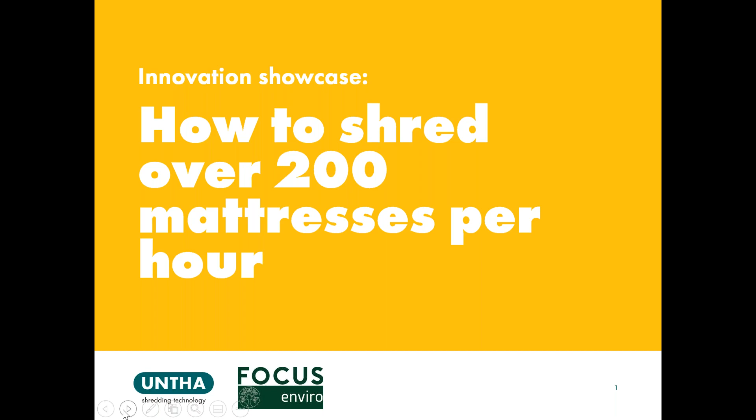Katie, as usual, thank you very much for that excellent introduction, very much appreciated. So, as we're presenting on a truly global stage, let me open by saying good morning, good afternoon, and good evening. My name is Gary Moore. And as you can see from the slide, I have gained some considerable experience in delivering the correct shredding technology and solutions to suit customers' many applications.

The majority of these for alternative fuels and waste recovery markets. With extensive knowledge of UNTHA's world-leading shredding technology, I am responsible for new business development and key account management, in which I proactively seek out fresh project opportunities, especially within the alternative fuels, waste, metals, and plastic market sectors. I work alongside senior waste and recycling decision makers to devise shredding solutions that will achieve their business objectives. I have over 25 years global shredding experience and joined UNTHA in 2015 and have director level role across Europe, Australasia, and the USA, with my own base being the UK as sales director. I have responsibility for strategic growth and development of the Australian market for the waste and recycling product range and the USA for the waste range.

Working alongside our Australian sole distributor, FOCUS Enviro, we continue to penetrate the alternative fuels market for UNTHA's revolutionary XR static and mobile shredder, designing and supplying best fit, client-centric shredding solutions for a wide range of UNTHA potential and existing clients.

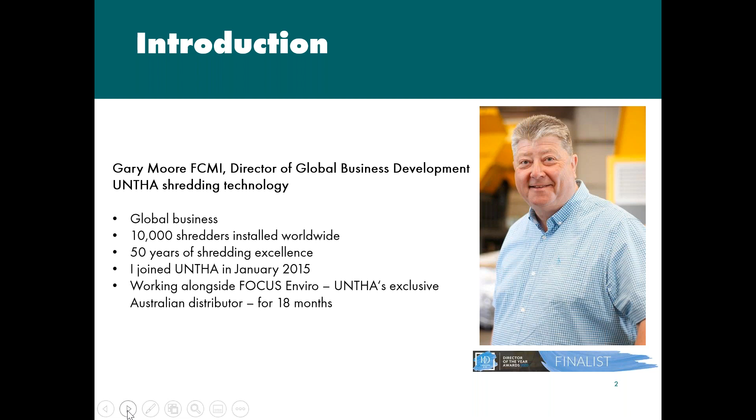So we've caused quite a stir in the UK when it comes to processing mattresses. And we think with the help from FOCUS, we can transform opportunities for operators in mattresses here in Australia too.

To give you a flavour of why, and to highlight exactly what we're here to talk to you about today, we'd like you to watch this 40-second video. It won't play sound as Katie advised, but you'll be able to watch it again with the music when you get your own copy of the slides later, so enjoy.

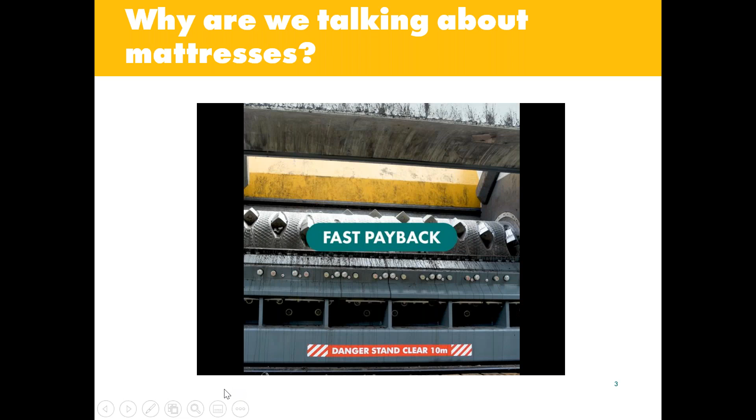So if we drill down into the topic of mattresses in a little more detail, we learn that of the 67 million tonnes of waste produced in Australia every year, you are currently disposing of 1.8 million mattresses, and that's how many reach a landfill site. That doesn't take into account any that are fly tipped or unscrupulously disposed of.

In the UK, the problem is even larger, with 7.5 million mattresses being landfilled per annum, which costs the UK over 20 million, or an estimated 37 million Australian dollars. In the USA, the number of mattresses being discarded every year is close to a staggering 20 million units.

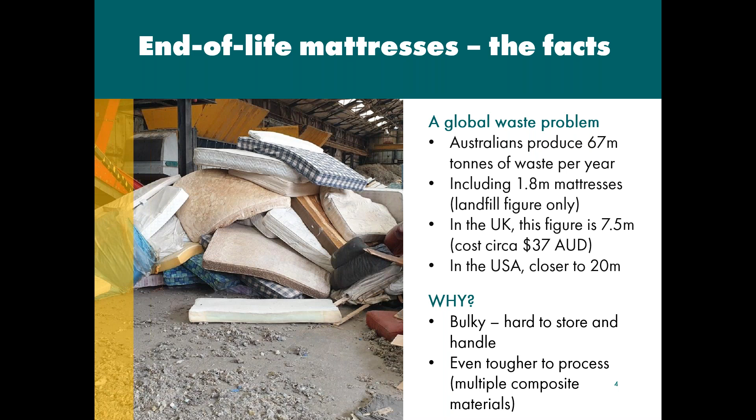So why are mattresses such a notorious and mounting waste challenge? There are many reasons, but primarily because they are really quite tricky to store, handle, and recycle. They contain many different composite materials that, without sophisticated processing, are locked inside this problematic waste stream.

For decades, companies have considered that there's no quick fix when it comes to processing mattresses. However, turning a blind eye to this issue cannot continue. Disposal costs are mounting, landfill space is running out, illegal dumping is sadly on the rise in many countries, and environmental pressures are growing. However, because of the headaches associated with their size and makeup and the cost traditionally associated with shredding mattresses, many operators consider them economically unshreddable.

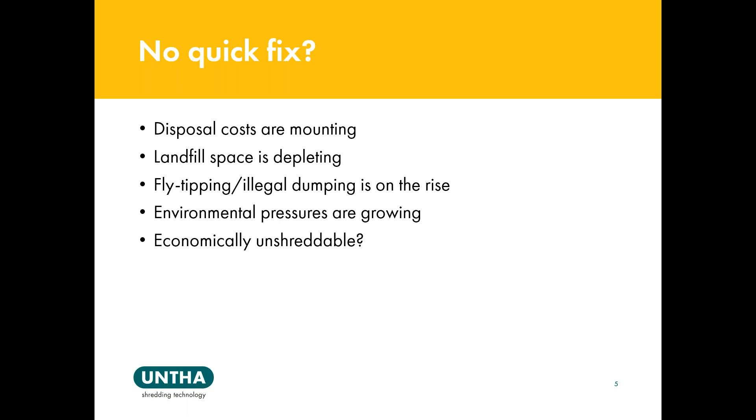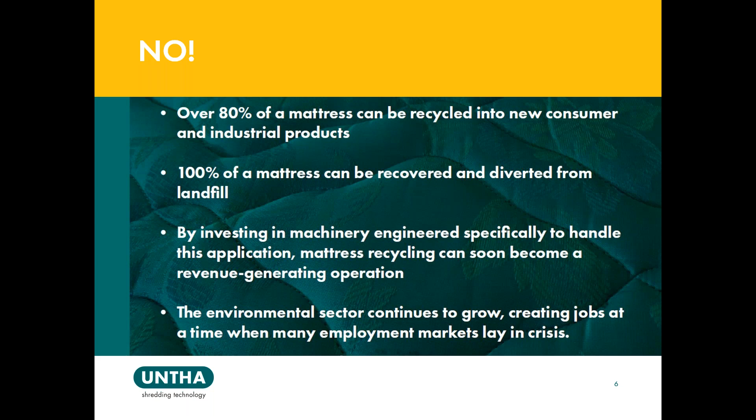But this couldn't be further from the truth. As we can see on the slide, over 80% of mattresses can be recycled into new consumer and industrial products. 100% of the mattress can be recovered and diverted from landfill. And by investing in machinery engineered specifically to handle this application, mattress recycling can soon become a revenue generating operation. The environmental sector continues to grow, creating jobs at a time when many employment markets lay in crisis.

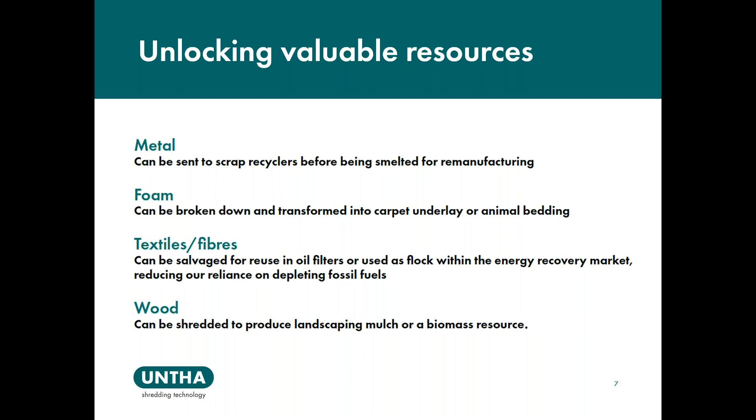So to be clear, there are lots of valuable resources within a mattress, and it's possible to get your hands on all of these. Unlocking those valuable resources, such as metals, this can be sent to scrap recyclers before being smelted for remanufacturing. The foam can be broken down and transformed into carpet underlay or animal bedding. Textiles and fibres can be salvaged for reuse in oil filters, used as a flock within the energy recovery markets, which are reducing our reliance on depleting fossil fuels. And of course, wood can be shredded to produce landscaping mulch or a valuable biomass resource.

So exactly how can we address this recycling challenge? To bring this topic to life, I'd like to shine the spotlight on a project I've been involved with over in the UK.

TexTech Limited is a company owned by JPE Holdings Limited that have more than 30 years experience of recycling technology and knowledge and are revolutionising mattress and bulky waste recycling. TexTech are based in Whitchurch, Shropshire in the UK. They're a recycling company whose aim is to divert as many mattresses from landfill as possible.

TexTech are working hard to convince as many companies as possible to recycle their unwanted waste rather than send to landfill. They already work with local authorities across the Midlands and many retail outlets to improve the recycling rates of mattresses, sofas, and other bulky waste across the UK.

TexTech have invested 18 months into the research and development of the first bespoke mattress and bulky waste shredding line that will divert a staggering 1 million mattresses a year from landfill. The UNTHA XR3000 HT shredding system design enables the successful separation of the flock from the steel, ensuring 100% of mattresses, sofas, or other types of bulky waste products can be recycled.

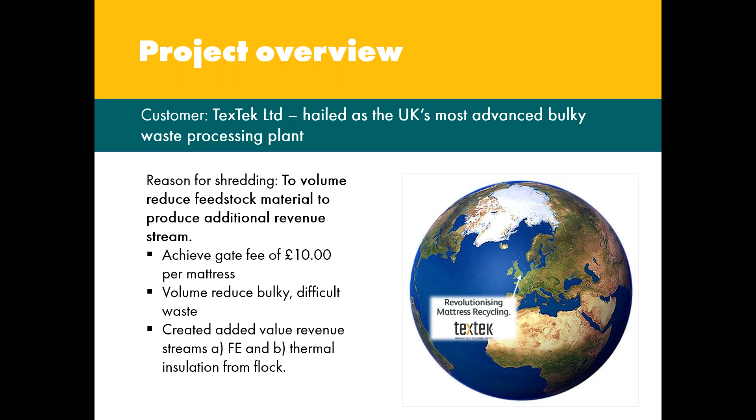And if we delve behind the scenes of their UK operation, we find that we have a challenge. Retailers and local authorities face two big challenges when recycling and recovering mattresses and bulky waste. The first is the separation aspect. The second is finding feasible end markets for the many complex materials to be recycled.

Traditionally, manual separation has been the only effective way to strip a mattress, but this comes with many risks. It's time consuming and expensive. Bulky mattress waste is notoriously difficult to recycle. Separating the multiple elements is time consuming, requiring highly physical and potentially dangerous working practices. Pocket spring-based mattresses and sprung mattresses in particular offer specific challenges as they contain between 1,000 and 10,000 single springs, each wrapped inside a textile-based polypropylene.

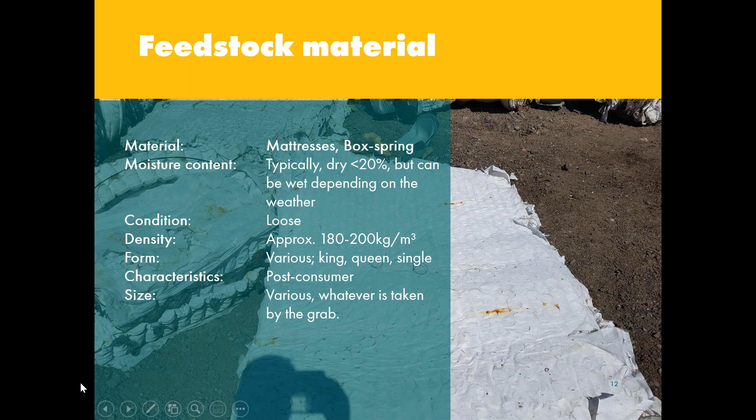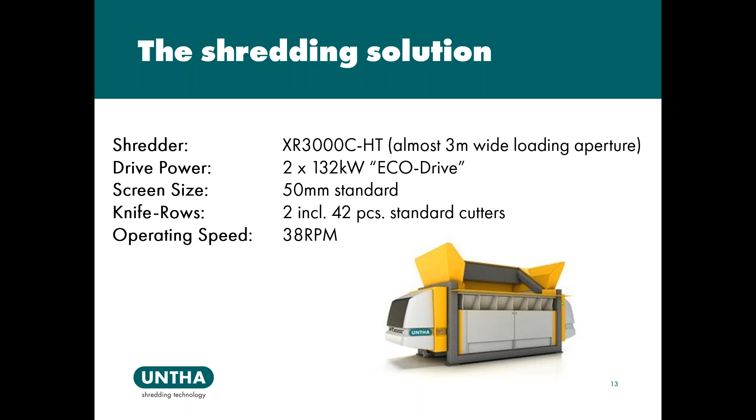For the shredding solution, we use the XR3000 CHT single shaft shredding system specifically for this application. The system is equipped with 2 x 132 kilowatt eco-synchronous drives, a 50mm standard screen for maximum liberation and separation of the ferrous and the flock, with very low operating speeds. Low speed benefit provides low noise, low dust, low heat generation, and low operation and maintenance costs.

Continuing with the shredding solution, we have an application-specific oversized feed hopper with a very large aperture for bulky product processing, aggressive cutters that grab, shear and fragment material while processing, individually replaceable, and Hardox rotor hard facing for wear resistant and long life rotor operation.

Quick change screen systems that can typically enable product sizing changes in 30 to 40 minutes. RAM assist to ensure the machine operates at peak performance by providing positive force on the rotor at the appropriate time. Rubber tracks for high performance on screedy floor surfaces, and vibration absorption.

Auto lube - fill it up and forget it. Computer control to ensure indication when low, and stops machine operating if below specific charge levels.

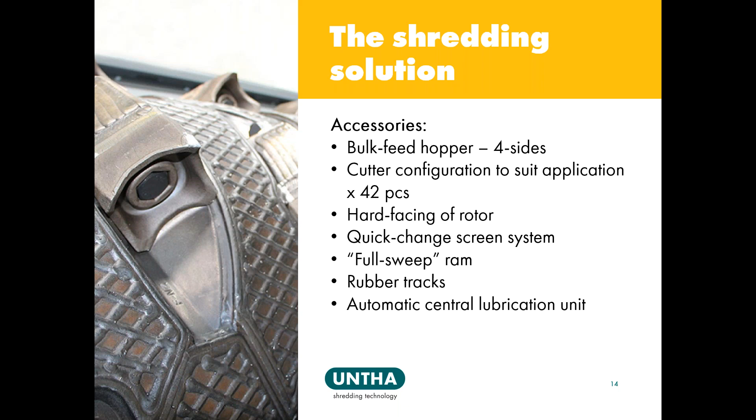And the ease of operation - the system can be fed by several proprietary options: grab, front end loader, conveyor. We have high performance, durable transom style conveyor belt discharge, which allows for 1 or 2 machine operation.

We have inline magnetic separation. Multiple magnets improve the purity of the commodity. We have air boxes for the removal of the light fraction, which enhances that commodity purity.

As indicated, over 200 mattresses and up to 288 for 2 machines in a single line. We have the ability for flexible operating hours, but typically these systems are operating 6 days a week, 10 hours a day.

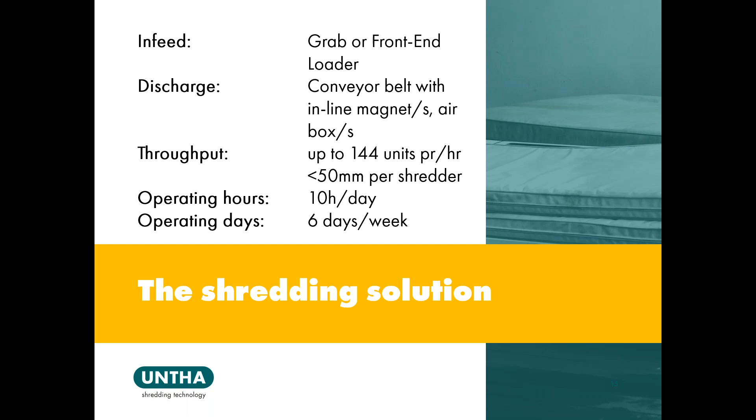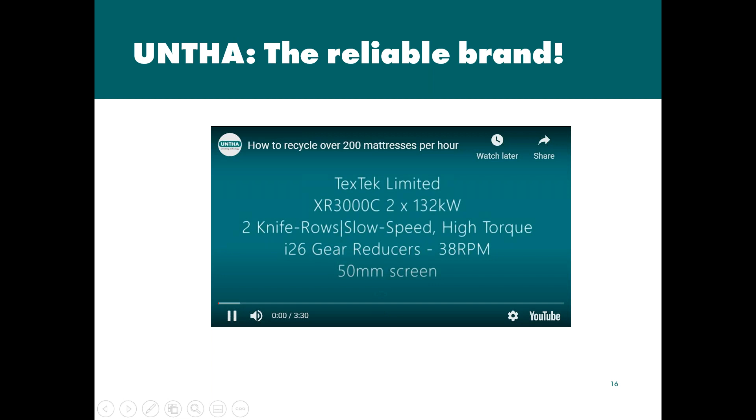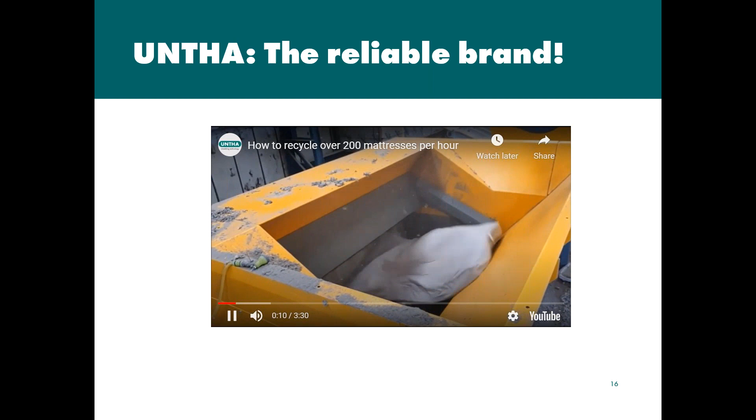So we now have a YouTube video, and I'm going to talk through this a little bit as Katie starts the video for us. You can pretty much see this is the machine that's installed at TexTek. They have 2 of these XR3000Cs installed to produce that magic figure of 288 mattresses per hour.

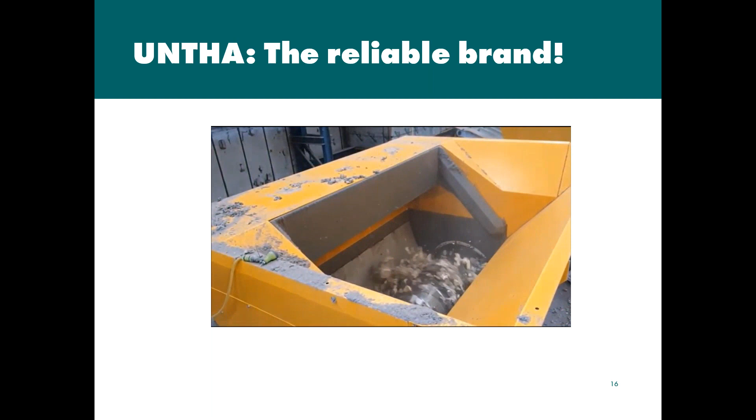You can see the machine there taking the old mattress in, and the rotor doing its job in terms of shredding, grabbing the product and then passing it through the screen. The left-hand section, the grey section you can just see moving, that's the RAM assist, which continues to give that very positive action on the rotor.

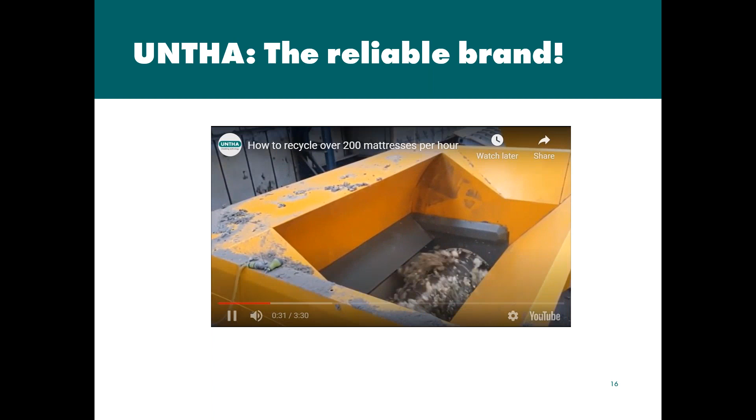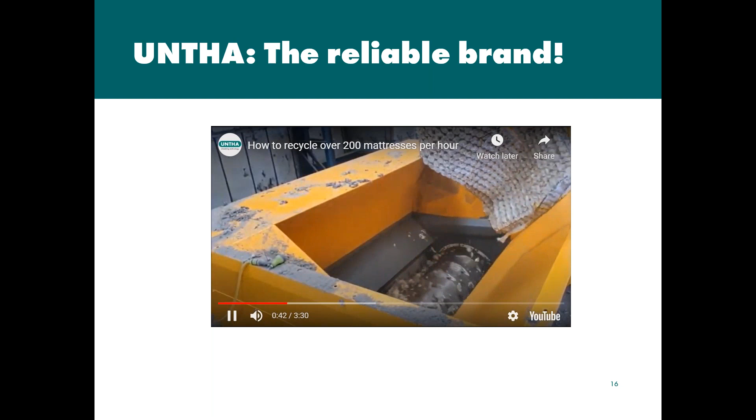As we load the machine up, we'll make sure that mattress continues to be pressed on the rotor for maximum performance. You can see there, rather than a sprung mattress going in, we have a box spring mattress going in as well.

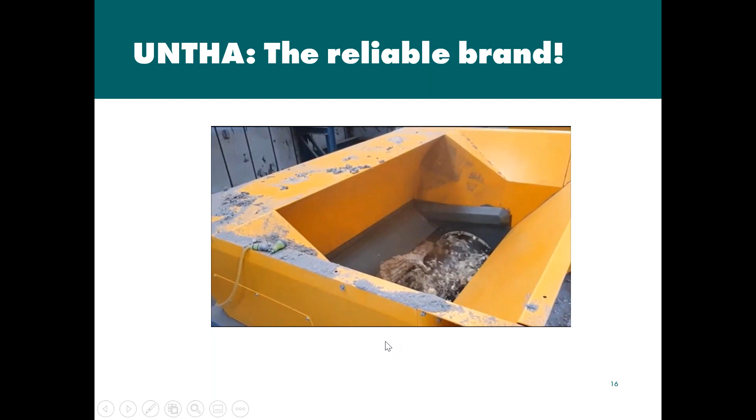And quite unusually, the box springs are a lot more difficult due to their ferrous content rather than the whole mattress. Again, we can see an old mattress just about to be dropped into the shredder infeed there.

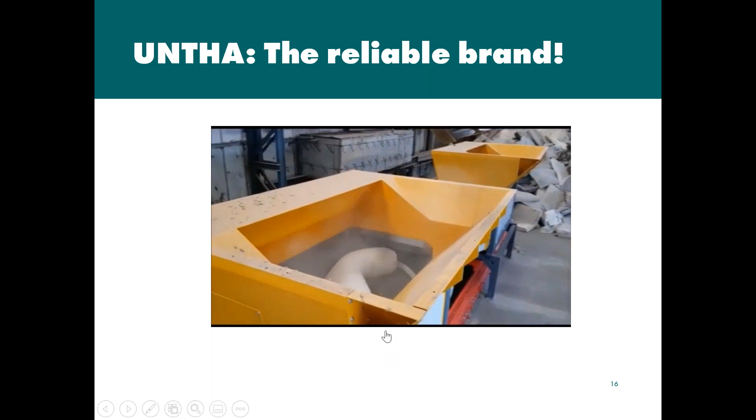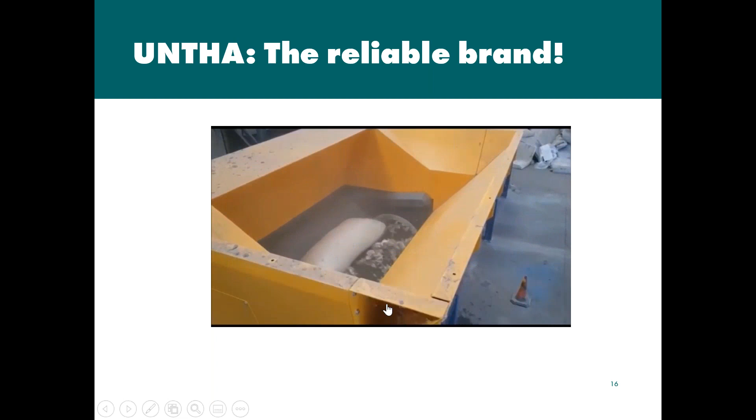Over the back, you can see machine number 2. Typically the grab driver will swing around to the left, feed one, swing around to the right, feed another, and he keeps that optimum process up all the time.

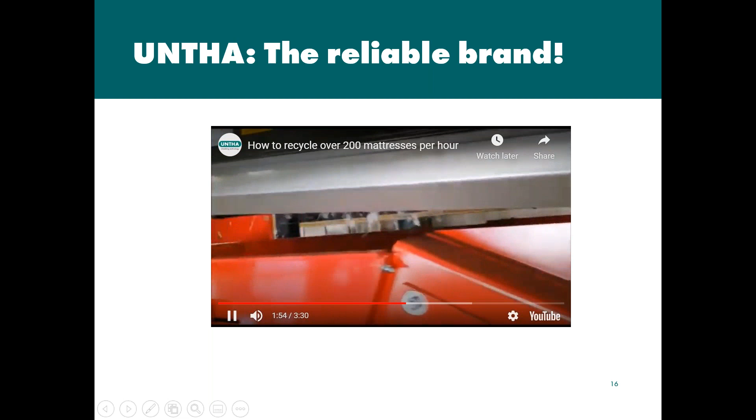Katie, if you can just push forward on the video a touch, please. And this section here, you can see this is the shredded material that's coming up the discharge conveyor. It's now passing underneath the first inline magnet, and just below that, the flock will drop out. The ferrous metal will continue downstream.

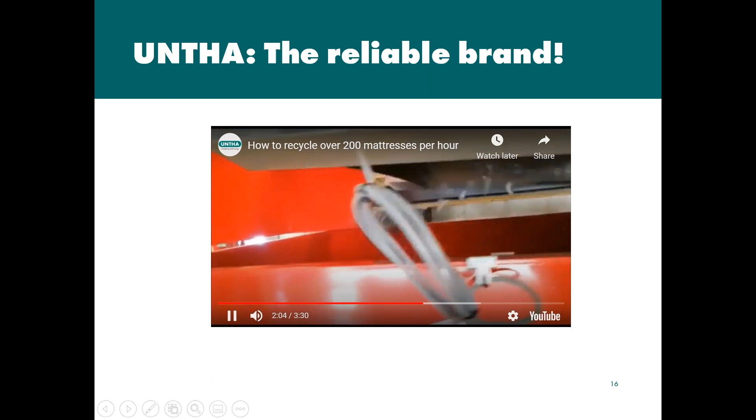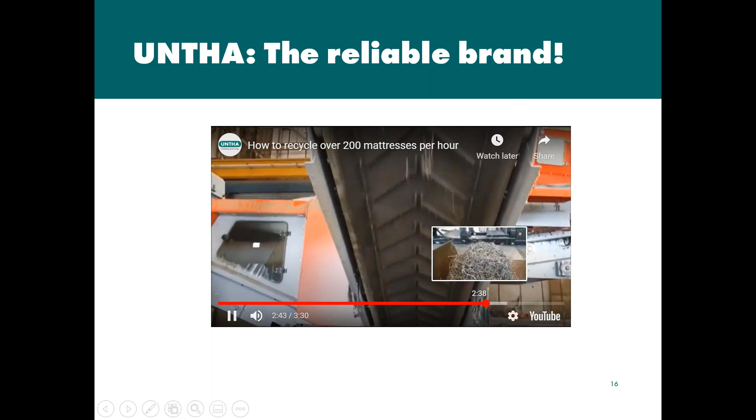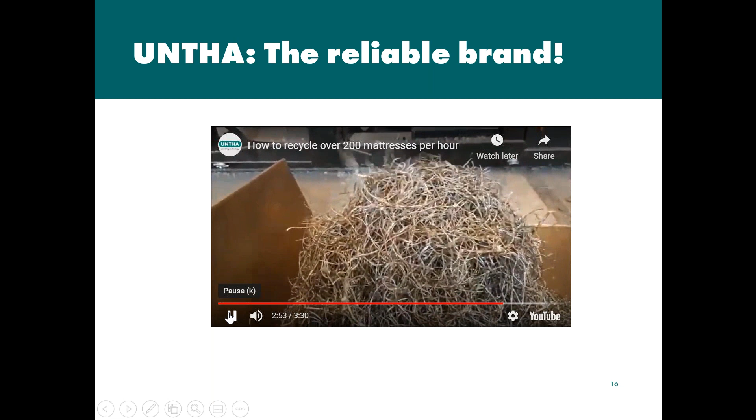You can see on that conveyor there, it's now following the conveyor down to the final discharge conveyor, and you can see the clean ferrous dropping there into that fairly large pile. So very clean ferrous product, and the guys are getting a premium price on this material.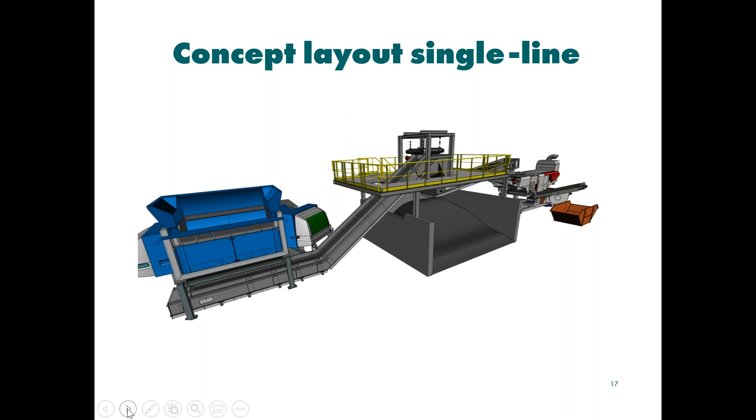So what is the system capable of? Well, it's a fully automated recycling line. It can mechanically break down a mattress in as little as 25 seconds versus the 7 minutes that it takes to manually disassemble a mattress.

It will shred to minus 50 mil or 2 inches to liberate that steel from the flock. And there's around 20 to 25,000 tons of steel wire that we can use and be remanufactured per year from this process. The downstream equipment will separate the clean flock from the contaminated material.

The latter is reshredded for a 100% recycling rate. The clean flock produces a very high calorific value, and this is mixed with SRF or PEF, as we call it in Australia, and that produces that very premium alternative fuel. And we are currently diverting around 1 million mattresses per year from landfill at this facility.

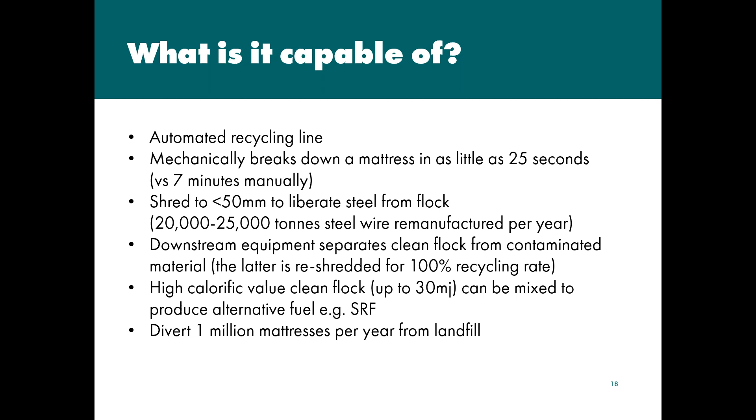So Martin Price, one of the directors at TexTech, has spoken very highly, and there's a great testimonial on screen from Martin. They really put the UNTHA XR through its paces during a rigorous trial before they invested in the technology. Theirs was a thorough due diligence process, but we did know the machine was fit for the job.

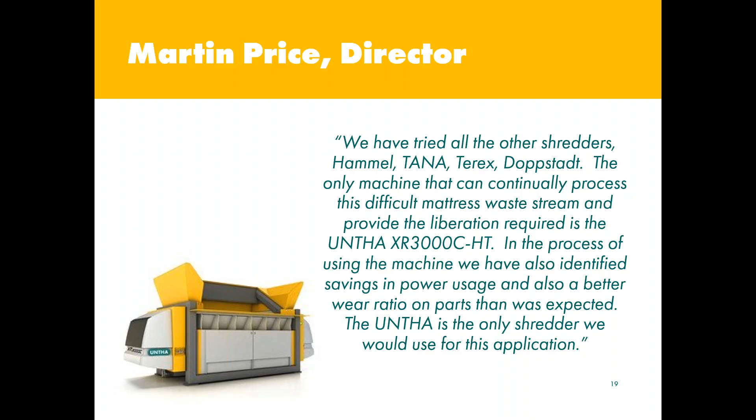And pretty much the innovation continues in so much that they've been really impressed with how UNTHA has transformed their business, and they're now keen to push more and more boundaries. And these are the numbers that are being achieved.

So you can see there, the single line produces 144 mattresses per hour, and the two machines that they're running in conjunction with each other will produce the 288 per hour that definitely suits their business. The weights of those mattresses are very, very varied, from a very cheap quality single mattress which weighs 18 kilos up to a very high quality textile mattress which is weighing as much as 82 kilos.

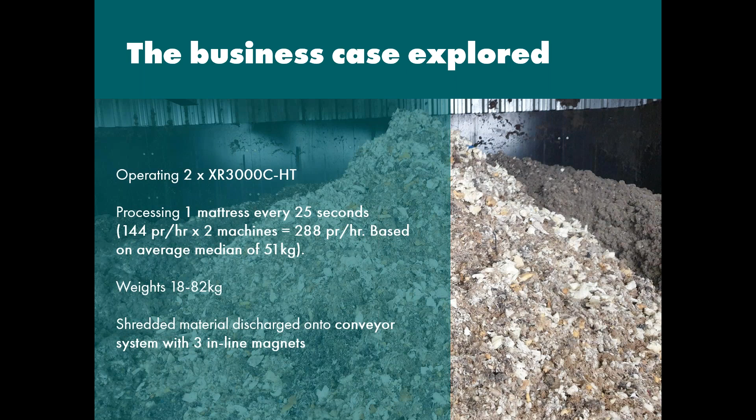And these are the figures that are being achieved. So typically over this side of the pond, the gate fee per mattress is £10 per mattress that the guys at TexTech are charging. When they separate the flock and we have the clean FE, with one magnet installed, they were achieving £200 a ton for the ferrous.

When they put another magnet in there, they then knocked that up to £220 a ton. So the FE was a little bit better quality from the second magnet. And then they really did discover they can really maximise and push the price up of that ferrous yield commodity by adding a third magnet. So there are various install options based upon the individual economics. And typically by FE weight of a mattress, content is around about 90% ferrous.

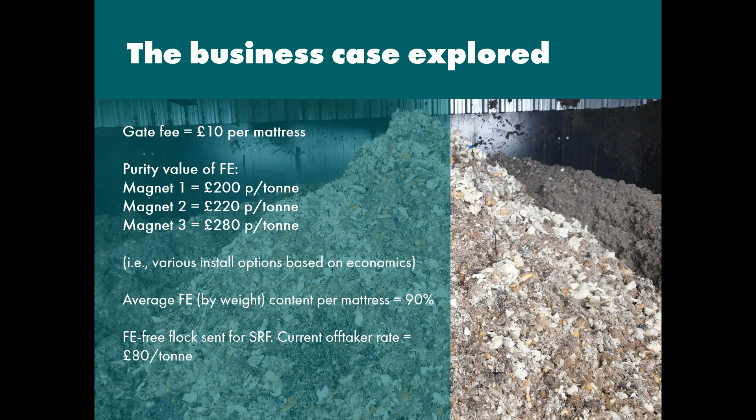And basically, we can rough shred or we can single step shred with this machine. And the recovery process is such that non-shreddables or marketable commodities can be removed prior to further processing.